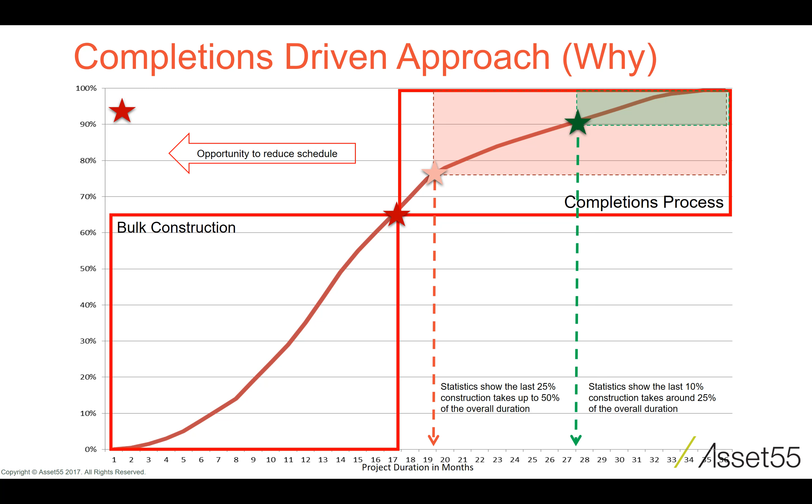We believe the opportunity to reduce schedule is to bring activities forward that typically fall in this last 25-30%, through a process of opportunity and constraint analysis.

When we do this, each of these milestones that we've highlighted here get pulled forward. There will be bulk opportunities post 65%, and all of this will drive reducing the tail and increasing schedule predictability and schedule certainty. It's all about capitalising on completions opportunities as early as possible.

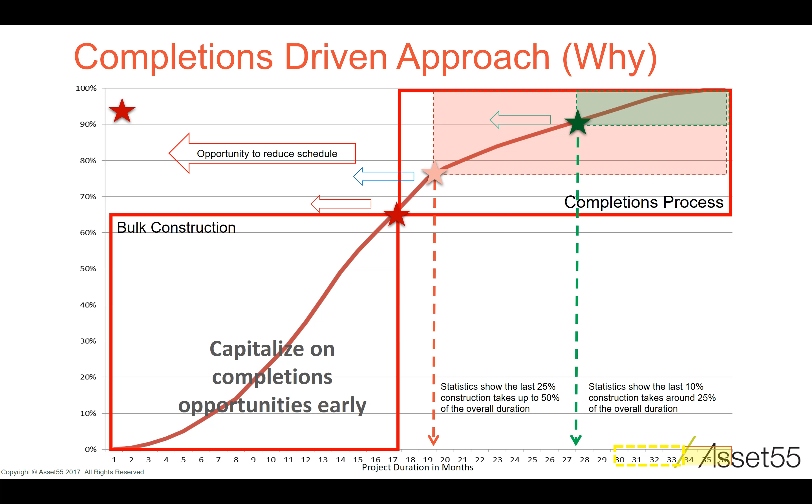So how do we do this? Here's a simple string of sequenced activities in the piping discipline, and what we do is we look at it differently.

From an analytics perspective, we want to measure what we call trigger points, or interface points, between different activities. This could be 10 spools and a test pack - when the 10th one is installed, we want to drive the test pack inspection to get out there and capture what the activities might be.

When you can reduce the time lags in between these interface points and openly communicate it, you have the ability to create, one, predictability; two, look at KPIs in a different way; and third, which is the ultimate goal, to reduce overall schedules.

It's the same from an E&I perspective. Typically you have good control of major equipment status inside of rooms, but it's really about focusing on getting the trays - and the right trays - in, which will enable your cable pulling campaign, and linking this then back to which devices need to be installed when, to drive your termination and your loop regime.

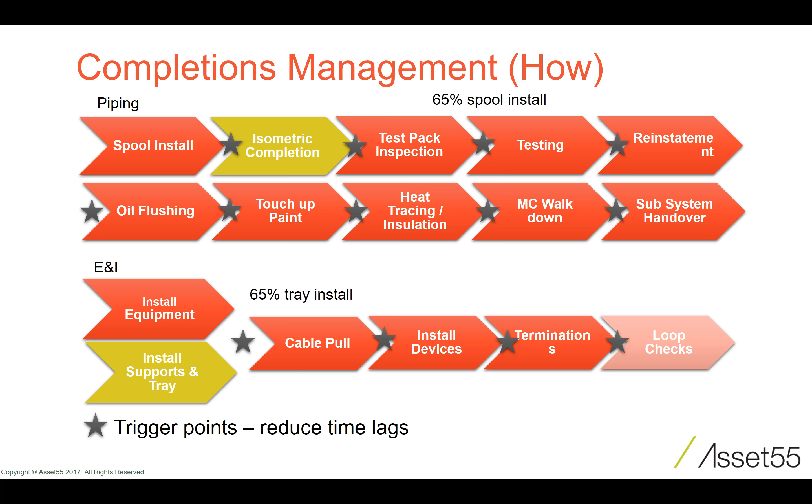So when you do each of these, you can communicate better, you can drive the behaviour of your contractor better, and you will save time.

So what is it we're looking at doing? Here's the high level activities and roughly where they fall in a standard approach.

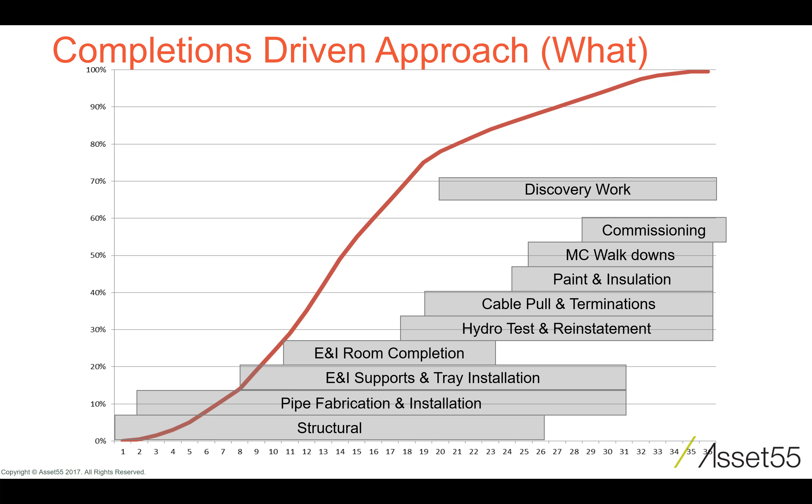Discovery work is something that hurts every single project, and normally it's identified too late, and that's because the inspection regime, or the completions activities, don't typically occur until the last 30%.

There are many reasons things aren't finished: missing materials, engineering changes, work done out of sequence, all driving discovery work. When we bring these activities forward, we drive the inspection regime earlier, so systemic issues are identified early and we work with contractors to reduce their volume before reaching back-end scope. Managing this reduces schedule pressure and back-end labour burden, which improves safety outcomes.

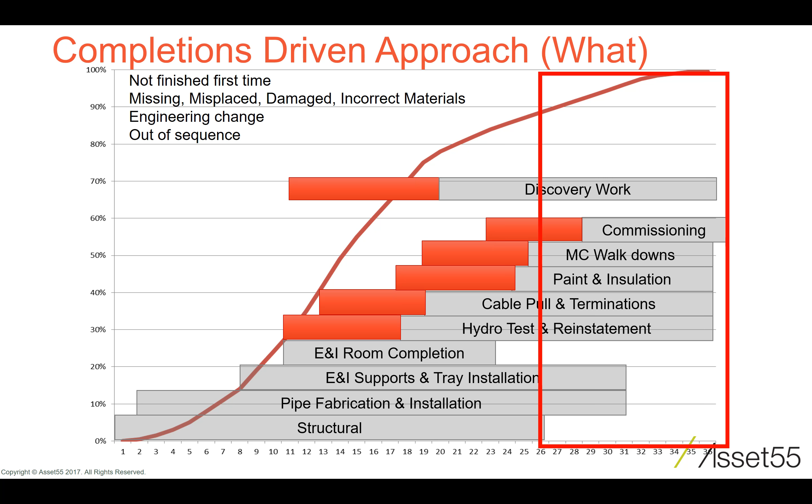That's an introduction into why a completions-driven approach is important, how it can be achieved, and what the focus areas really are. So I want to touch on work face planning.

Work face planning has had a lot of attention over the last 5 or 10 years, particularly alongside a process called advanced work packaging. We see these as two different elements: work face planning is about optimizing plans and creating alignment, while advanced work packaging ties together the relevant deliverables the guy at the coalface needs, like documents and materials, to do the work.

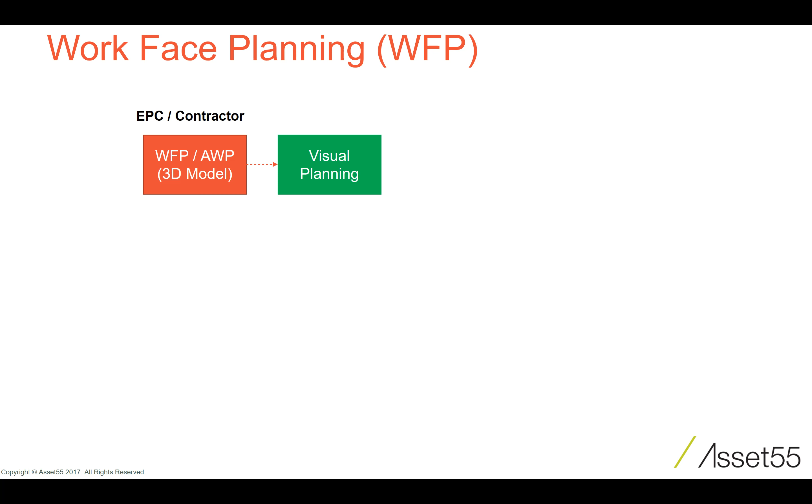From an EPC or contractor's perspective, they have a different need and driver. Whilst there is visual planning, they also want to know: are the documents available? Are they IFC? Are they in my document management system? Are the materials available? Have they been ordered? Is it company supplied? What's the status and where are they? And what indirects are associated with a piece of scope—do I need scaffolding, do I need a crane to execute the work, etc.?

All of this is pulled together into logical groups of about 1,000 hours for a work package, and each of these is sequenced to largely optimize a plan. One drawback is that the available technologies, like Bentley ConstructSim or Smart Plant Construction from Intergraph, aren't really scalable—on smaller scale projects, less than maybe $500 million or $1 billion, it's cost prohibitive to use these tools.

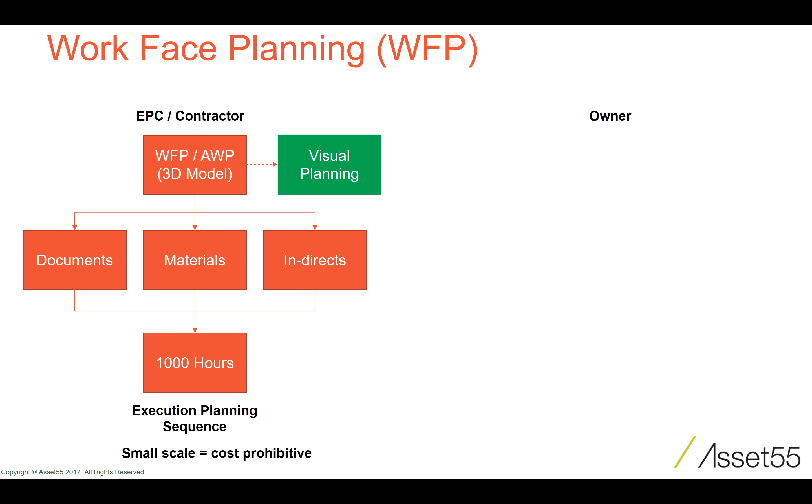So we want to explain this from an owner's perspective—they have different drivers and potentially a different need from the tools. Whilst the owner still wants the ability to visually plan the work, why they want to do it is different: it's about gaining internal alignment within their own team or with external stakeholders that aren't the construction contractors. They can work out the optimized sequence and how this should be grouped, which enables challenging the contractor's schedule.

Thirdly, a completion strategy can also be tied into this planning process. A lot of the time now, commissioning and startup is driven by the owner, so this information can be pulled through, which will largely drive how you can make a contractor behave and work. It's really all about generating the possibility to influence outcomes.

Whilst you want to plan for the best, you need to be prepared for the worst. So if intervention is required, you need everything associated with that intervention to enable the next contractor or somebody else being brought on to drive the change, enabled from one place.

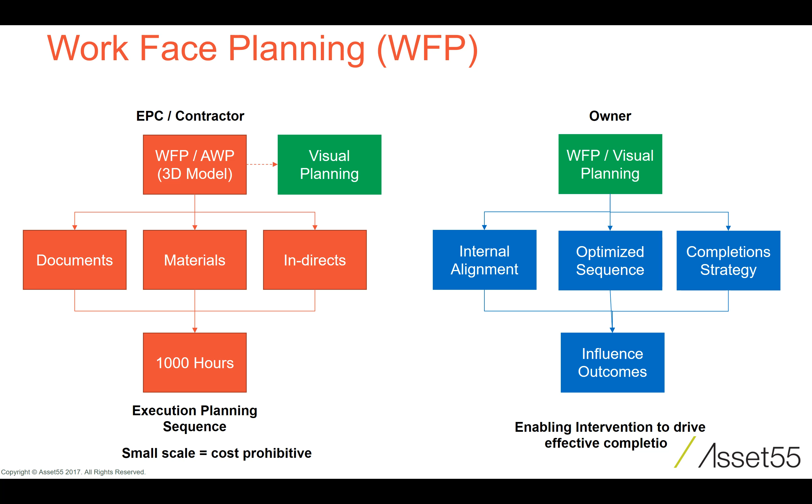This describes the subtle differences between the owner and EPC needs, and our solutions are much more focused at the owner and scalable in terms of not being cost prohibitive for a smaller scale project. So we're now going to focus on the model viewer element, the analytics for opportunity constraint analysis, and enabling completions strategy within the construction and completions module.

We're going to show you how these two interplay. Like with any cloud-based solution, there are security protocols to enable a user to log in, and depending on the user, different access rights are ultimately given. Once in, it will tell you who you are.

So this is me, Daniel, logged in. It will identify what projects I have available to me. These are two prototype demo projects, so I can select which project, and then within the project it's going to tell me what type of models I can open up.

In each case we're showing you the same model, but opening it in a different way largely affects how the user can interact with it. We have construction and completion, your standard view of opportunities and constraints, about the enablement piece. We also have a work package view, so anything grouped into work packages will be viewed differently. So we have the reference, the different project types, and really it's about the way users interact.

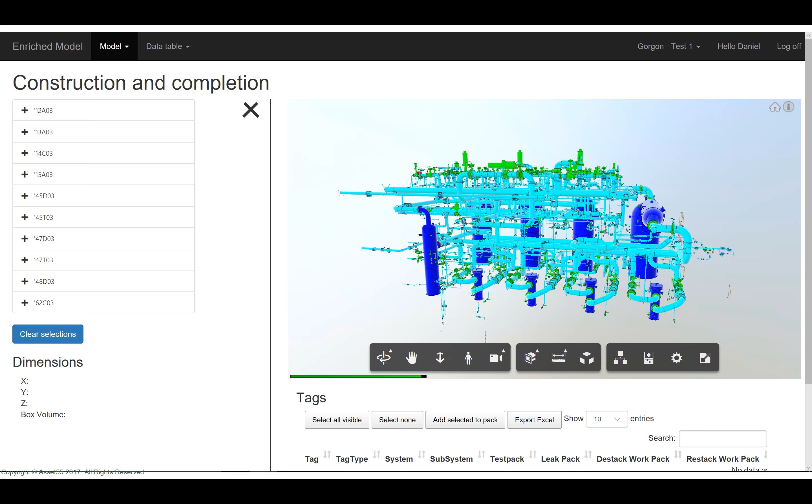Here we can see we're part of the Gorgon project. It's construction and completion, so it tells you where you are. The selection tree down the left has been created based on a system grouping, which we want to use from a completions perspective.

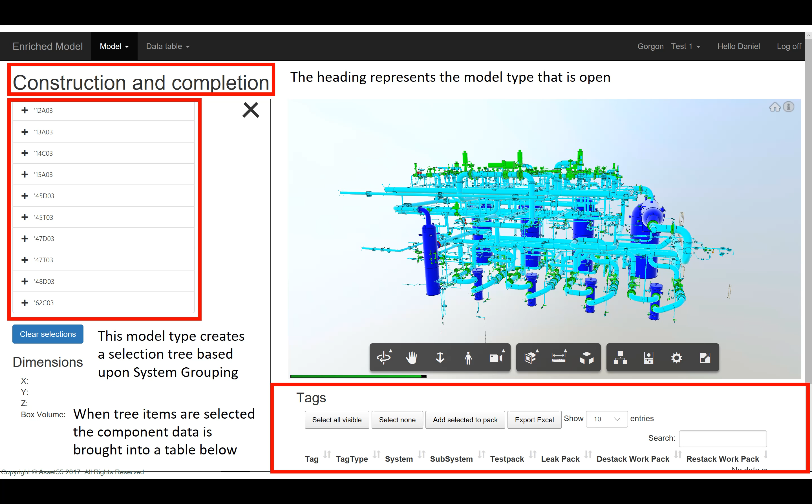Down the bottom here, the area called tags, this is where all the detailed components reside. They can be added to work packs, selected and filtered, and the visual representation made to match. Up here we can minimize a lot of the data so we can interact with the model in a bigger way if needed, and this can simply be opened up.

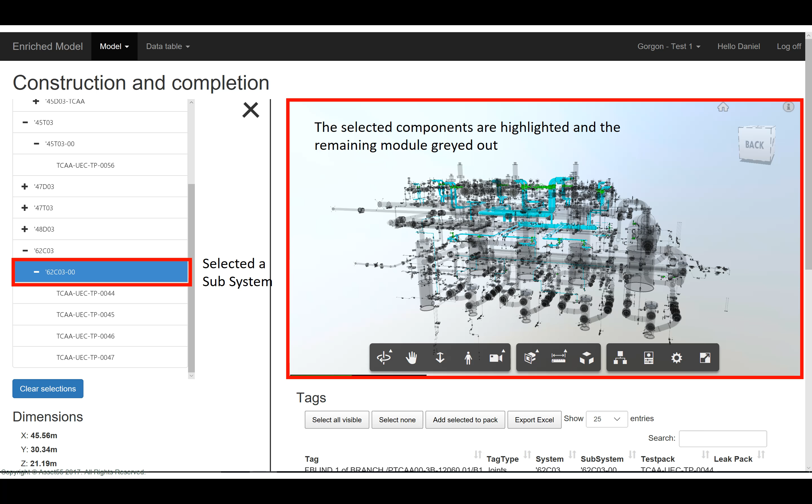What we've now done in system 62C03 is drop down into selecting a subsystem, the -00 equivalent. On the right hand side, everything else has been grayed out and everything associated with that subsystem has been selected. To view the components below, you can choose how many you want to select in a given space. Here we've opened it up to 25 entries, and down the bottom there are 156 entries.

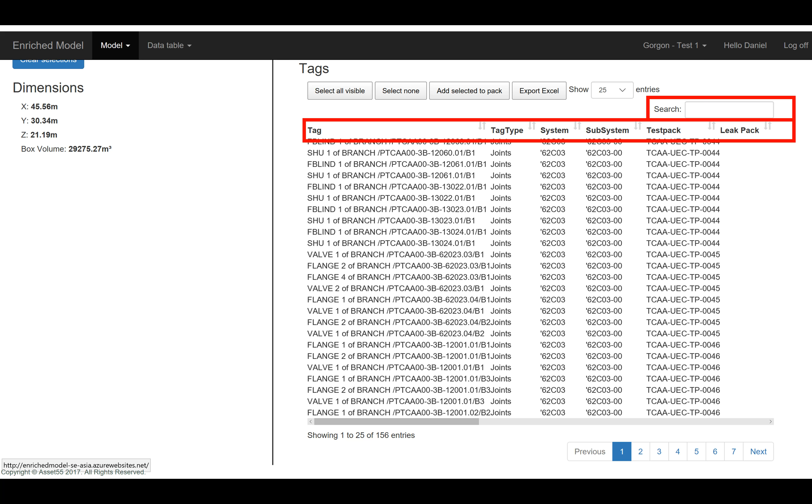All the different attribute-associated data can be scrolled across to the right, and there's also search functionality. If the volume of tags is large and some items are known, you can use the search functionality.

So here's the next visual. Instead of being at the system level, we're now down a level. This is test pack 47 within that subsystem, and the model visual automatically zooms in and focuses just on that individual scope.

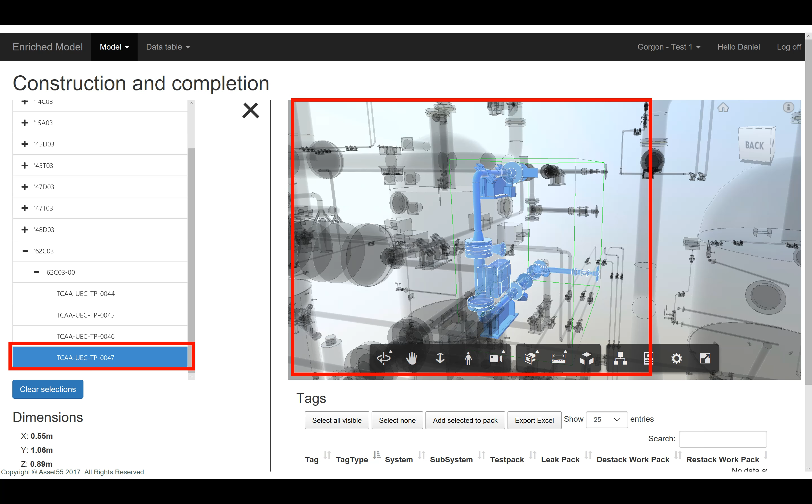We can also use the search functionality here, and we're going to search for test pack 44, or search on 0044. Anything across the attributes that has 0044 will be pulled in, but this just isolates everything associated with test pack 44.

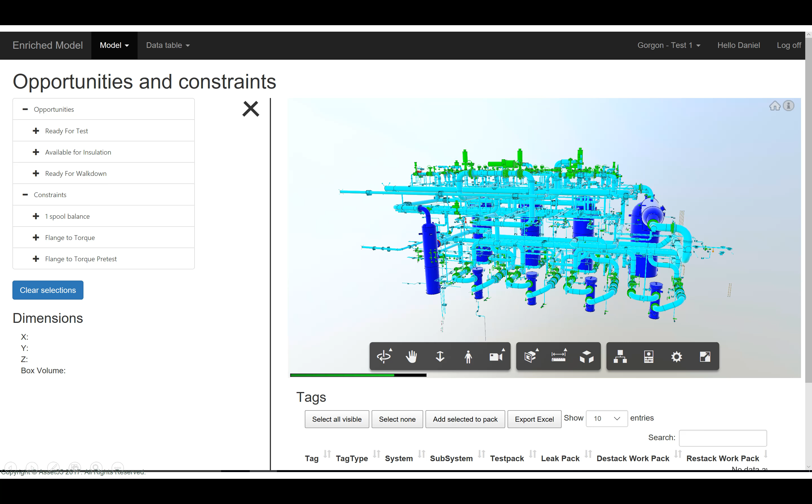Now we're going to look at the next different interaction. The model type now opened up is opportunities and constraints. Here the selection tree changes, categorized by different opportunity and constraint types.

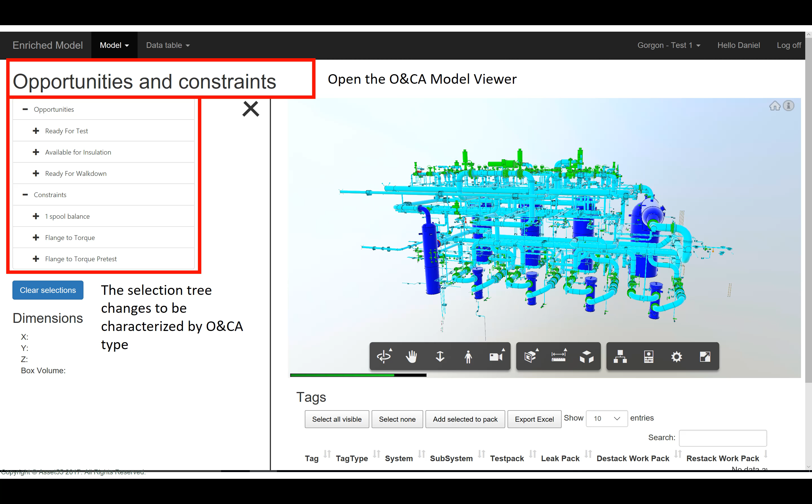Under opportunities we have things ready for test, available for insulation, ready for walk down, and under constraints, things like one spool balance, etc. These can be customized to the project type and what the owner wants to drive.

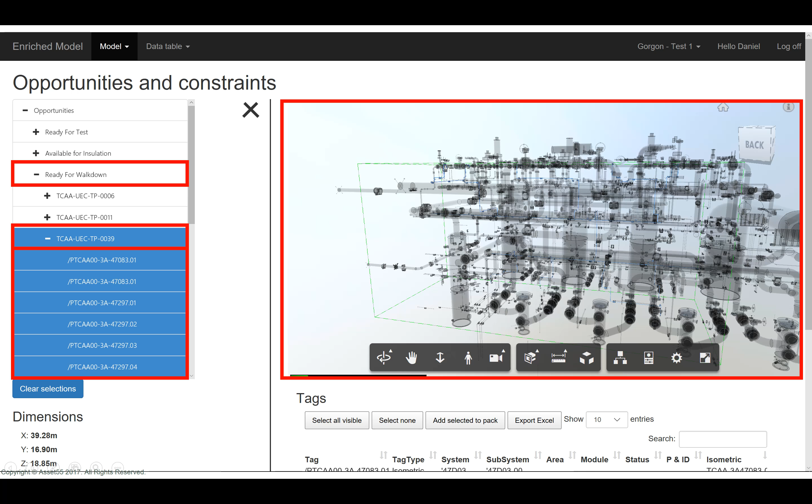Down the bottom we can get all the different isometric data associated with it, plus all the other attributes, and what we want to do is create the ability to export this information and potentially print out some of the drawings if need be. The process enables us to do that very quickly and export the information.

Now we're going to look at a constraint type. The analysis has shown that this is a test pack that has a certain number of spools, but only one spool that isn't reported as being installed.

Within test pack 12, it focuses in on the one individual line and takes us straight to it to drive the superintendent to an area where, if he can complete the spool in that area, largely there'll be a test pack available for walk down, and the constraint will move, flagging into an opportunity, which is the test pack will be ready for walk down.

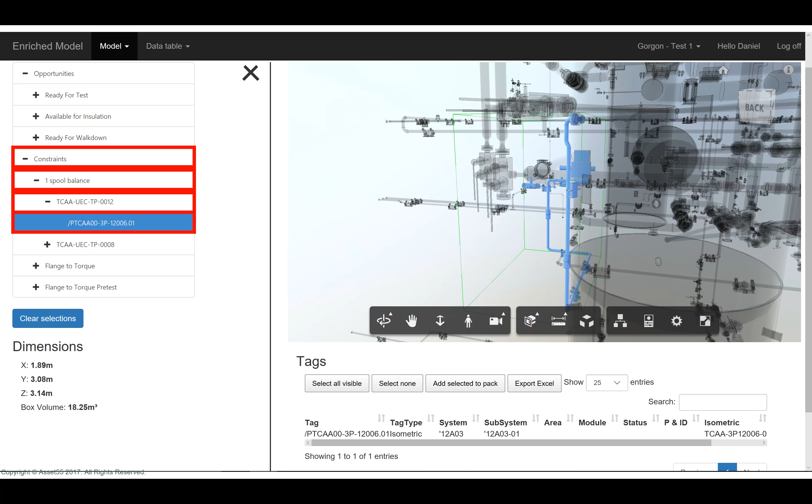Here's another constraint type. It's a flange management or a joint that needs torquing. It identifies that the joint is actually part of the valve, and it's focused straight in here on the valve, so the work can go and be completed.

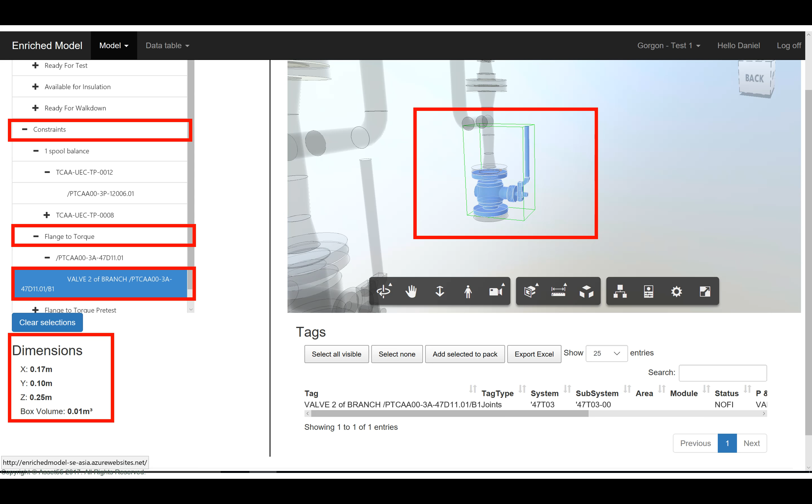An extra element of functionality in here is a dimensional or box volume. Let's assume we're getting close to the end of a project, and some of this needs to be either taken out for ship loose, or there's an element where it needs to be taken out. Procurement can use the tool at the same time to identify the box volume and optimize containment for shipping.

So this is now the third view of the same module. This is a work pack view. Again, you can see that the selection tree has now changed by different work pack types. So what we're looking at here is a transition work pack. It will group it by system level, so system 15A03, and this is what we've selected here.

So what we might say is, why would this subsystem fall under this system? That doesn't necessarily make sense. As you can see on the right hand side, we have the model visual of where this transitional scope is.

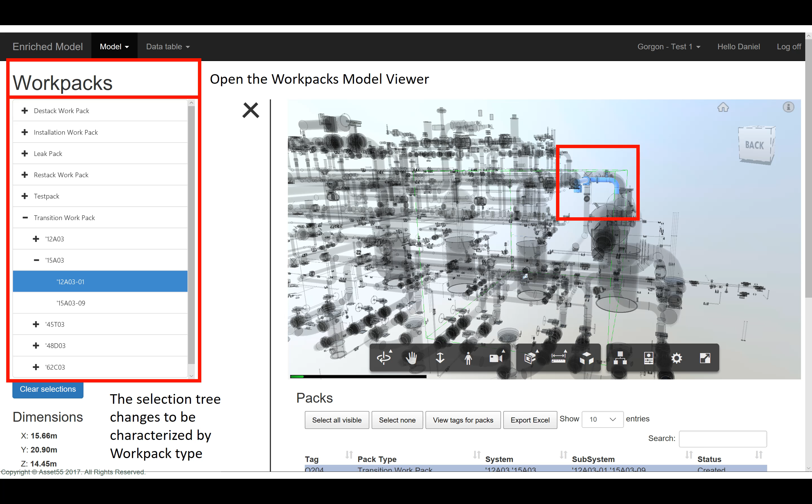So let's now look at the data in a bit more detail. Here it will tell us what the work pack number has been called, Q204. It's a transition pack, and you can see here it's been flagged across two systems.

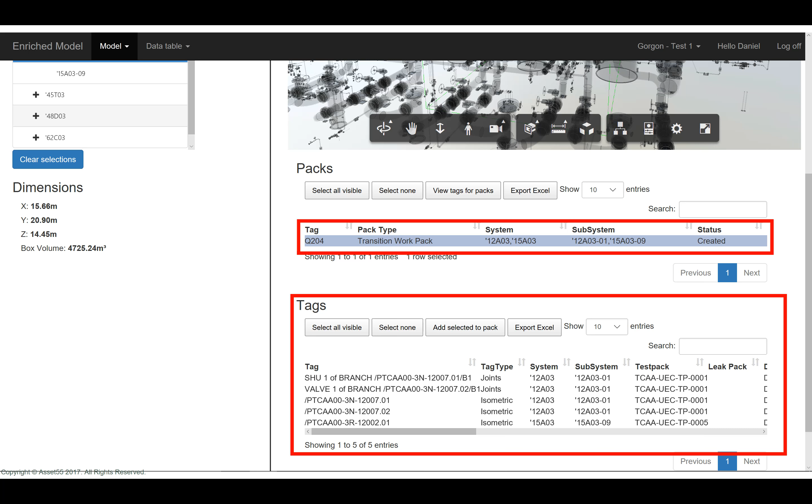When we look at the tag associated data here, we can see that while the majority of it is in 12A03, there's also one line that crosses into 15A03. So it's obviously on a system boundary, so that transitional scope will be flagged against both subsystems, as the work will need to be completed prior to completing those subsystems.

So now we're going to look at a different project, because the interaction on this one was slightly different. You can see up here we've opened a different project. The standard view in this case, construction and completions, is different to the one we viewed previously.

So now instead of a systems-based tree, the configuration here is different, and this is because the module here needed to be seen as pre-assemblies, PAU A, B and C. So what this is showing is the standard view is completely customizable to the user or the project.

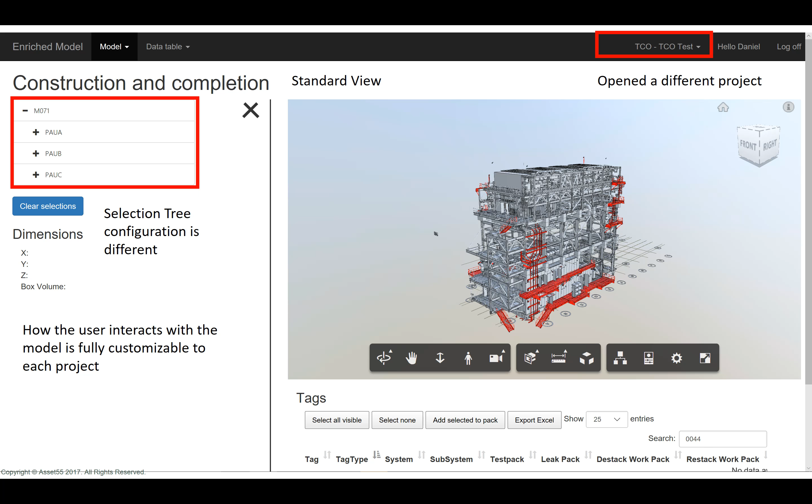So what this now does is we can select at the highest level PAU A, and it will identify everything that has been tagged to be associated with PAU A. What we can then do is within it use the isolate button, which will then remove everything else that's grayed out, allowing a much greater level of interaction, without the user needing to scan through different areas of the facility where there's no interest.

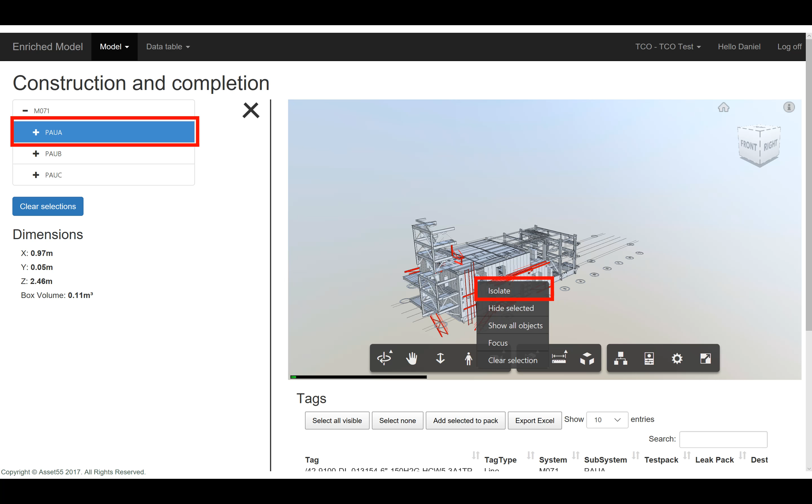What we can then do is drill down to a further level of detail. So this is now still within PAU A, but we've just isolated everything that's either flagged as a cable tray, a device, an equipment, or a junction box. And the model visual is here.

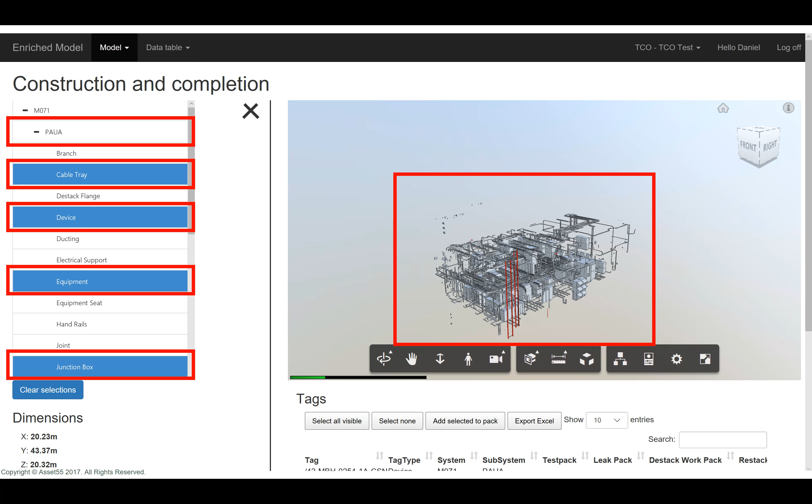So in both of these examples, we haven't pulled in status because that data hasn't been made available. But with status, this can be pulled in on a daily or weekly basis. We could use our progressive inspection module to capture status through using this solution on iPads or even your mobile phone, to pull different statuses back in, which then largely will drive different opportunities for visualizations for the owner. Thank you very much indeed.